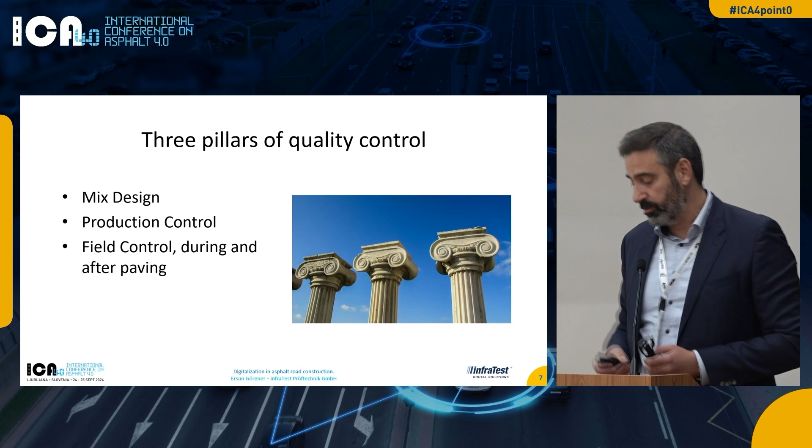My personal definition is digitalization has to make our life easier. This is, for me, what it has to be, not more, not less. So, starting with these words, I would like to come to our field of work, quality control. As I always say, we have three pillars of quality control: the mix design, the production control, and the field control during and after paving. I have only 10 minutes, so I've picked a few topics and will give you a small overview. Later you can ask questions, and during lunchtime we are at our booth where you can ask questions and see what I will show you now directly live.

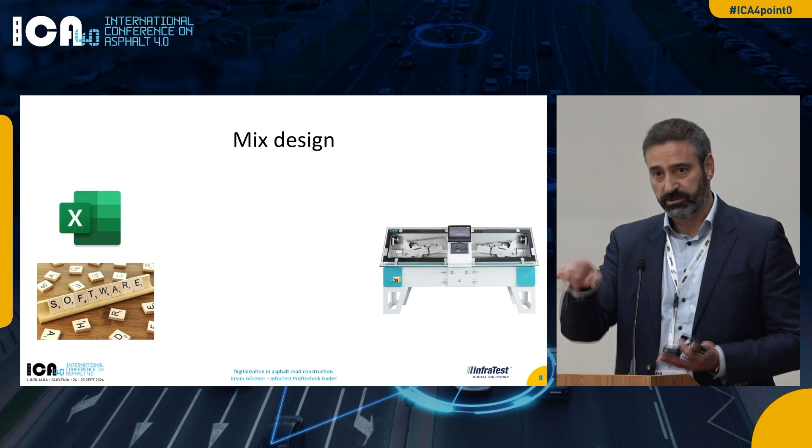When it comes to mix design, it's easy. We make a lot of tests in the laboratory and take the results. And nowadays, more or less, we still use ordinary notepads, or an Excel sheet or software, but somebody has to put it in there, written or using a keyboard. But the next stage has to be, will be, and has started: the machines and software have to communicate. It's not a question of if, it's a question of when.

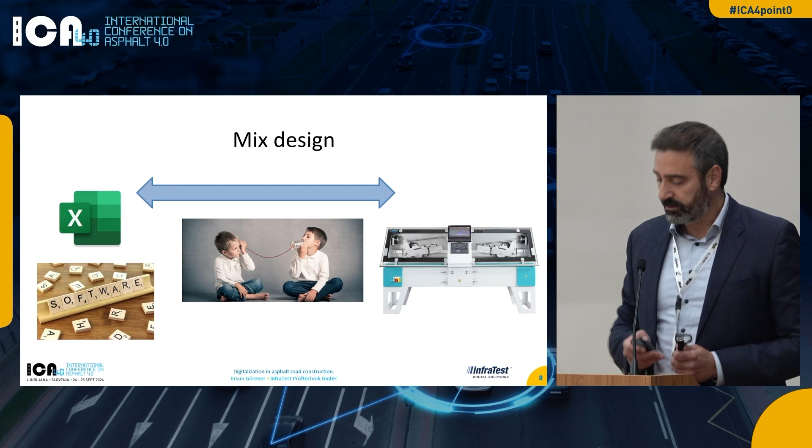And this started and will be one of the next projects and topics for quality control engineers in the laboratories. Also using the clouds, getting all data and combining this data in one cloud system and taking it out wherever you are, and not having to be somewhere to check it out.

So now we come to field control. This is the part where I want to talk more about it, because I think this is what makes all these things, as Ralph said today, sexy. So we have to be more sexy than until now. When it comes to field control, this is for me one of the best.

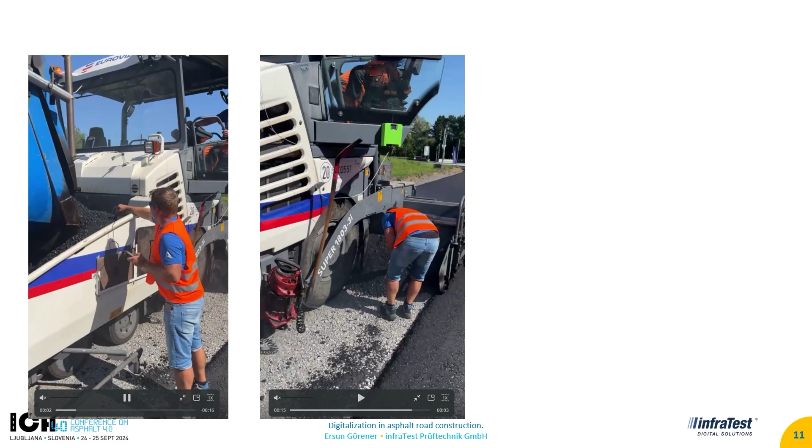This is in Germany, because of the regulations, what we have to do. We talked about this also last year in Madrid. We have to take the temperature of each truck during the dump of the asphalt into the finisher. It is mandatory. You have to do this. And actually, at this moment, this is done by people. They are going there with a temperature probe and checking it and taking a note.

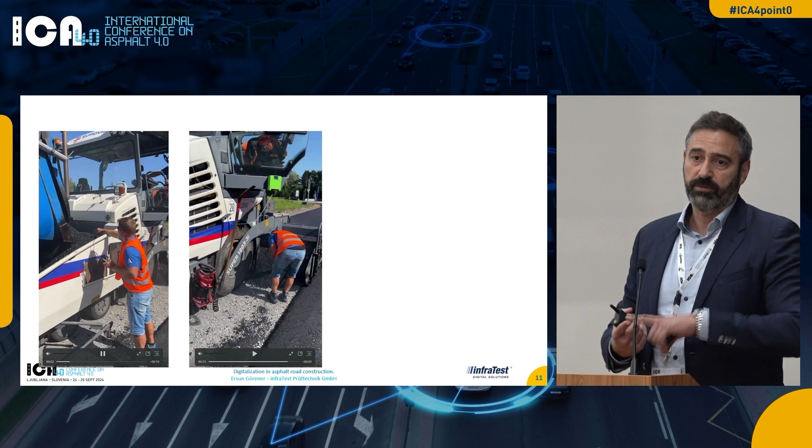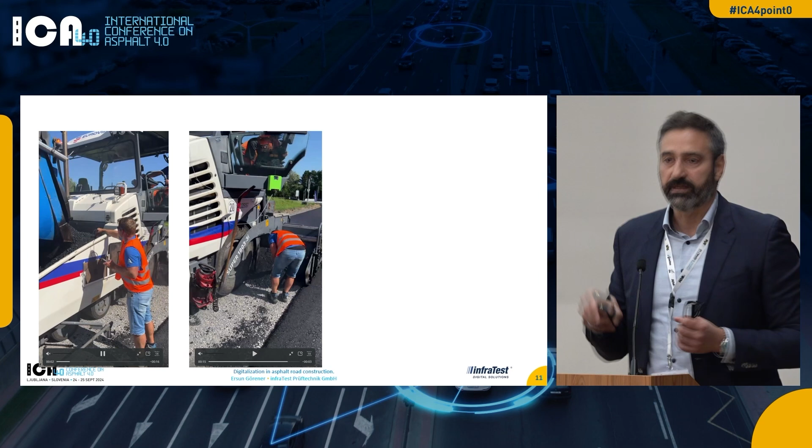So you can do this, yes, but on the other side, we are talking about work safety, workers' safety. We are talking about digitalization. We have 2024. It doesn't fit, and it is really dangerous. Imagine if you work with two finishers at the same time, and somebody is running around there, and the people who are running the finishers are in stress. They don't want somebody who comes there and measures, etc. It doesn't work. It shouldn't be.

So what can be done? You can really use very, very easy methods, but they have to work, of course. Easy methods to check it. You can use, as it is shown here, special sensors, infrared sensors, which detect the whole time the temperature of the dumped asphalt. And we use, for example, special ultrasonic sensors, which detect that a truck is coming, so to know, okay, it is for this truck, and the next value is for the next truck.

And then you can get the report and send it directly to the authority, and it's done. It is safe, it is fast, and at the end it saves you money, because people nowadays are expensive and because they are not there. Good people are not there.

And perhaps one point back, why is this also very important? We will hear this today. For example, my colleague from Germany, Stefan Haneschweger, will talk about the topic of warm mix asphalt. In Germany, it's not only a wish, it is now there, it will come, starting with 2025. We have to produce warm mix asphalt, and at the end of the day, somebody has to check if the asphalt which is produced is really warm mix. The authority wants to see that it is warm mix when it is delivered.

The people who have the job to pave have to know, do we get the right warm mix from the asphalt plant, etc. So you have to implement these types of technologies to be on the safe side for all of us.

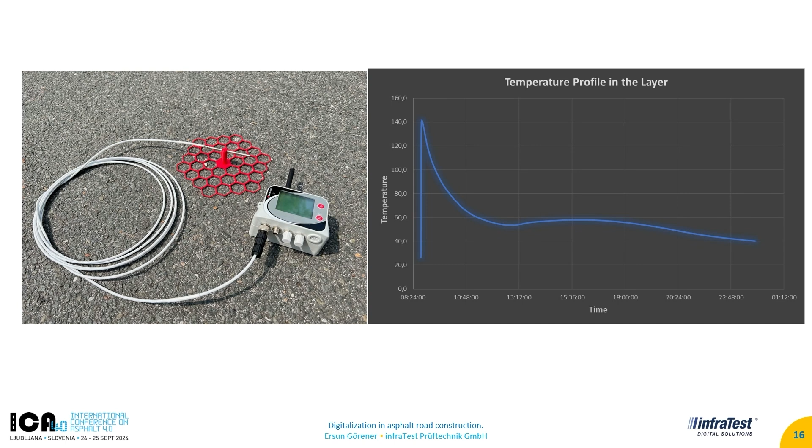And this is important to know at this moment because things are changing. People working outside are used to knowing how the hot mix asphalt and its temperature react when it comes at 170, 180 degrees. They know it. Also the people who are driving the compactors. But this will change because the temperature should not be 170, 180 anymore.

It will be something between 120 and 140, I don't know, something like this. And then you will not have so much time to compact your asphalt and your hot mix. So it's mandatory to know what is happening, what is the cooling phase, the cooling time of your hot mix asphalt, and know it and monitor it.

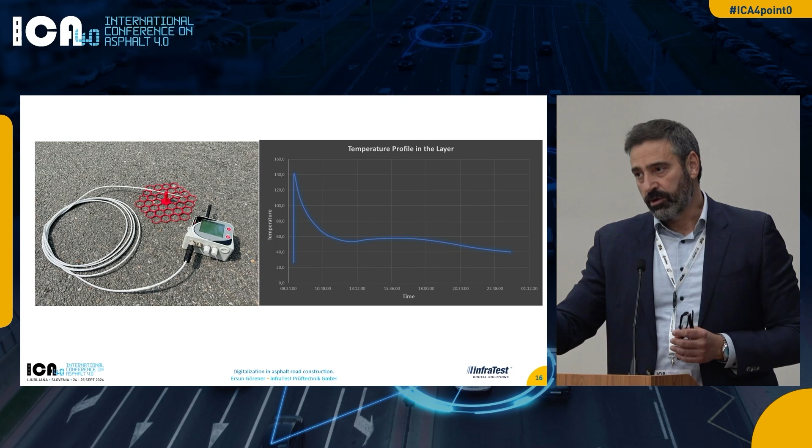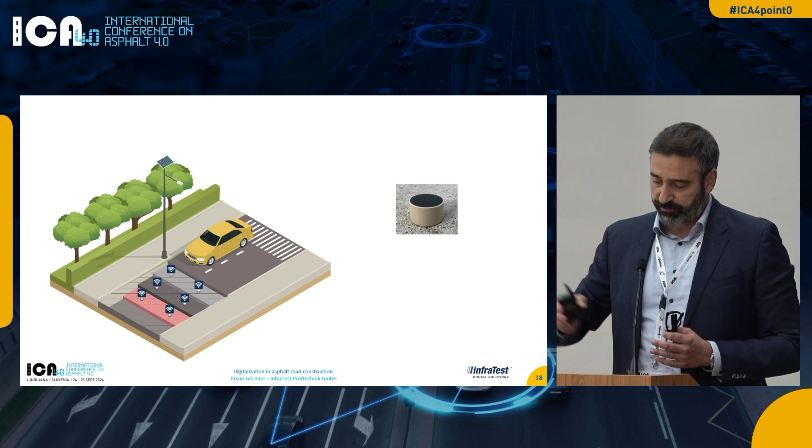And that's the problem. These are, for example, limitations when it comes to sensor technology used in hot mix asphalt while the asphalt is delivered hot. As I said, in this type of sensor you have a temperature measuring system. For this unit, it's not a problem. It can measure up to 260, 300 degrees. But there is also a battery in it. And battery and temperature, these are two things that don't like each other. So to save the system's life, the system shuts down once it gets an extremely high temperature impact. The system shuts down and waits until it's cool enough and then starts again.

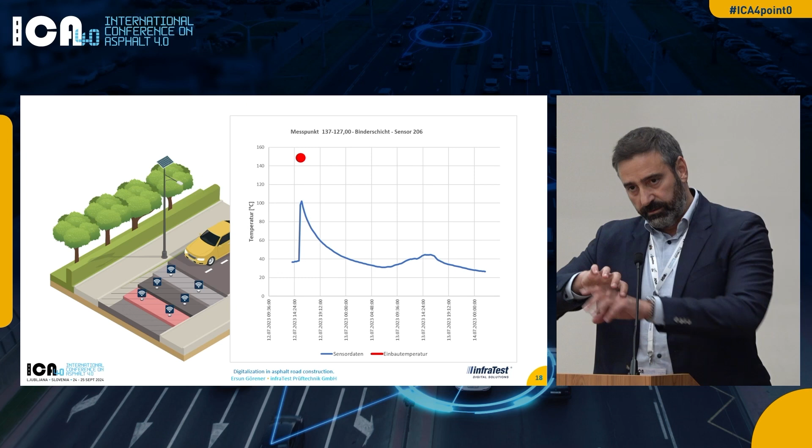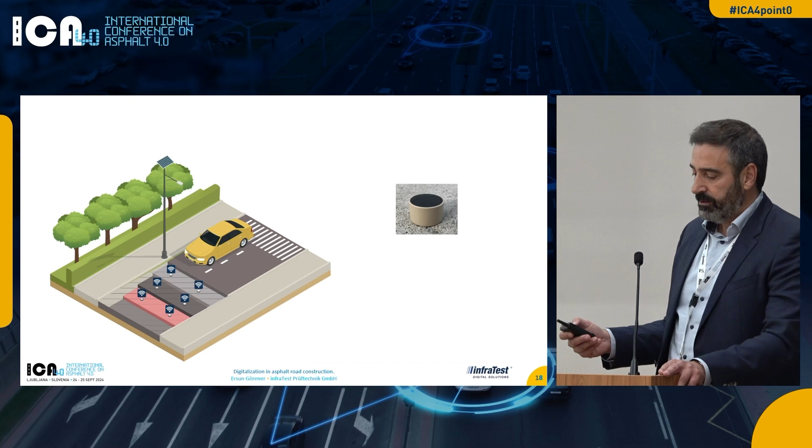And this restart is by chance. So when it shuts down at 125 degrees, for example, then it waits until it has a safe ambience, and then it starts. And this can be, by chance, 110, 105, or 80. That means, different than here with the ordinary, let's call it old method, where you can measure the complete temperature range, here you cannot do this, because especially at the beginning the cool down rate of the hot mix asphalt is very fast, and you miss the most important first degrees.

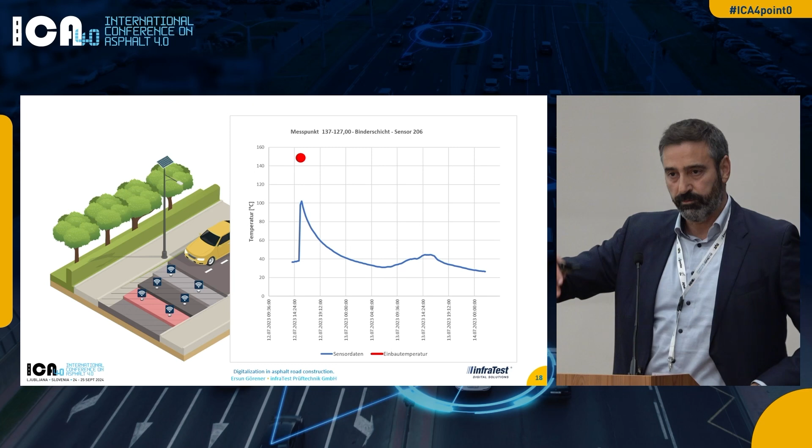So these types of sensors are very interesting and very good for long-term monitoring, where you put them into the asphalt and say, okay, I want to know the temperature profile within the next 1 or 2 years, and then get the data back.

But of course, we want to know more. We all read newspapers, or meanwhile we don't read newspapers, we look at our mobiles and iPads, etc. And what we see is we have a problem. We have climate change, and things are changing. The reason can be X, Y, Z. It's not our topic, but there is one fact: something is changing. And we have to know what the effect of this climatic change is on our road network. I'm sure there is an effect, but we don't know it at this moment.

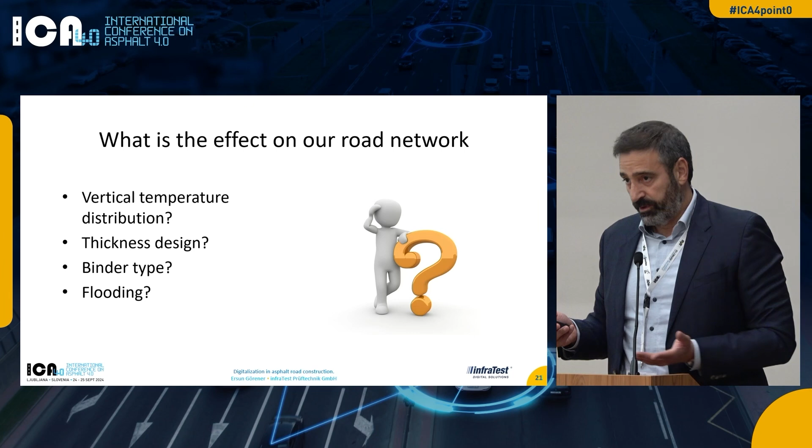What is the effect on the vertical temperature distribution? What is the effect on the thickness design? Because when there is an effect on the vertical temperature distribution, then we have to think: for our thickness design, based on data we got, depending on the country, 50 or 40 years back, do we still use the right data? Or the binder types which we use, etc. Topics like rutting and so on. We don't know what is happening.

So for this, because we are here now in Slovenia, I checked what the climatic zones in Slovenia are. And even though it is a country with 20,000, 21,000 square kilometers, we have 3 climatic zones here in Slovenia. I think it is very interesting to know the climatic change and its effect on these different climatic zones. Or perhaps, regarding asphalt and pavement, do we have different climatic zones meanwhile or in the next years?

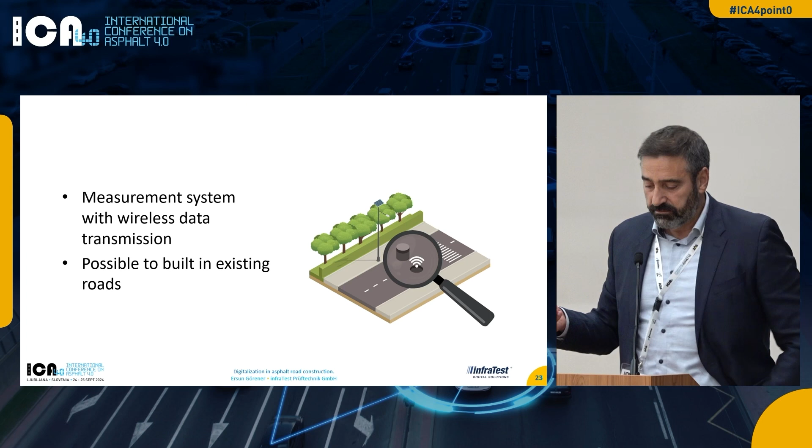So what can we do here? This is the idea: to have measuring systems which collect the data and send it wirelessly, so you can directly monitor it. And this is, for example, this type of artificial core which you can use. They measure the temperature constantly, transfer the data wirelessly, and have a really easy installation into existing roads.

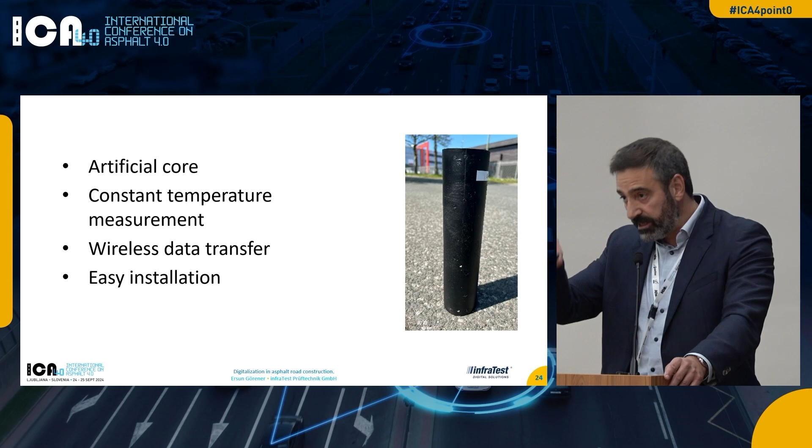It's, as shown here, very easy to take it. You take a drill core out of the existing roads, you put the artificial core into the existing roads, you backfill it with the resin, and that's it. There's nothing else to do.

Then you connect the artificial core with a gateway, and the gateway sends all the data directly into the cloud, and from there you can get it into your existing system. And interesting here is, here you can use, for example, the so-called LoRaWAN technology. The maximum distance between the core and the gateway, outside regions, motorways, etc., can be up to 15 kilometers in open area and 2 kilometers in cities.

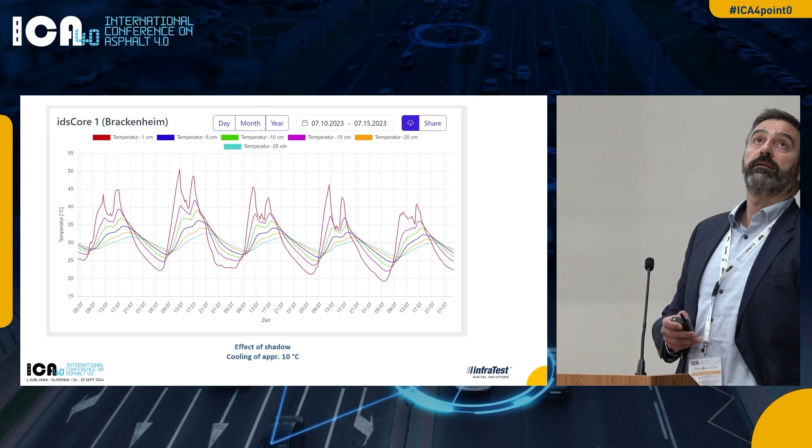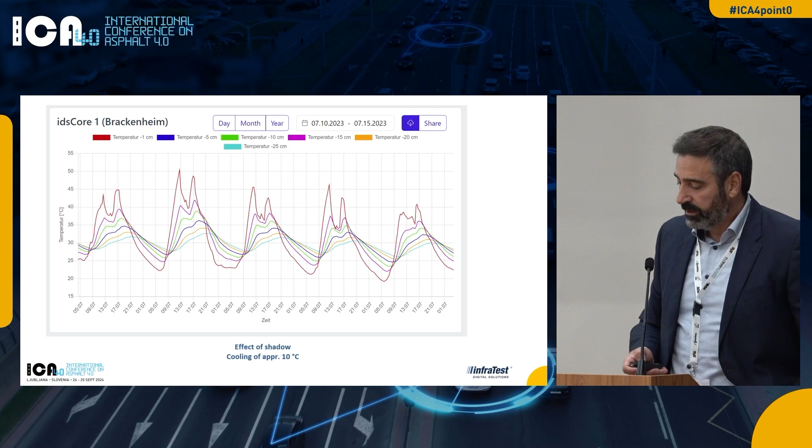Just to show how things like this look, it's one of my last slides. This is a temperature profile which we measured in Brackenheim in front of our factory. And what you can see is that during noontime, the shadow of the tree, what you can see there, is directly on the sensor. And there you can see the peak, which goes down approximately by 10 Kelvin. And this is only the effect of one tree.

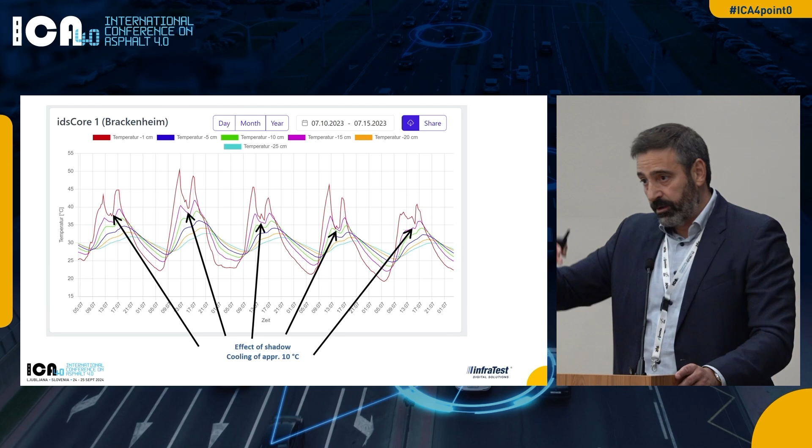So we don't know how the effect is in cities, for example, where you have shadow systems because of buildings. Perhaps we are over-designed or not thick enough, because we have special areas where you have only pure sunshine without any shadows, etc. So conclusion, it's my last three words.

I think, and we will see it the next days and today, we have digital technologies which enable us to understand asphalt better than ever. Because until now, sometimes you make everything right. Design is right, paving is right, production is right, but it doesn't work. And you don't know why. But now we have possibilities to understand why.

We have to be open for this. This is a topic which we had also today in the morning. We have to be open to try new technologies, because if we don't try new technologies, if we don't act now, we react tomorrow. Thank you very much.

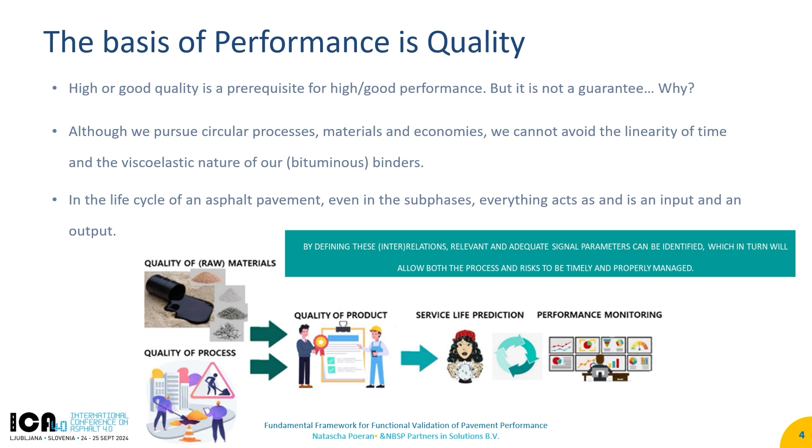And then the other interesting thing about our pavement life cycle that also hampers us to really be fully in control of this pavement performance is the fact that we try to reach for circular processes, but within our pavement process, we cannot deny the linearity and, for example, the viscoelastic nature of our asphalt mix in the basis. It means that everything in this pavement life cycle, every time you perform an activity to go from one stage to the next stage, you provide an input for the next stage, and in the next stage, you will always provide an output that will be another input for the stage again. So it's a continuous cycle.

And it means that if in the beginning you have some measuring fault or some measurement mistake, the only thing that will happen is your mistake will grow and grow and grow, till at the end you have your pavement and maybe it fails in 2 days. You will never be able to find out why. You do the same thing 2 weeks later and that pavement will lay there for 20 years. Don't know why.

That's not making my life easier. So, I think...

The first big step we need to take is to be aware of these relations in the life cycle stages. We need to make them explicit, because this will allow us to define, for every phase in our life cycle and for every relevant activity that we perform in our pavement process, what are the relevant parameters to measure.

For example, the temperature in the layer is very relevant if you are processing the material. So if you have the bulk matter on the site and you want to make it into a preformed layer, it's very important to measure the temperature. But is it also very important to measure that temperature in the use phase? We don't know, right? But by making these functional interrelations explicit, we at least, if we apply new techniques and new methodologies, have made a place for that data and those results to be relevant, to be used and analyzed.

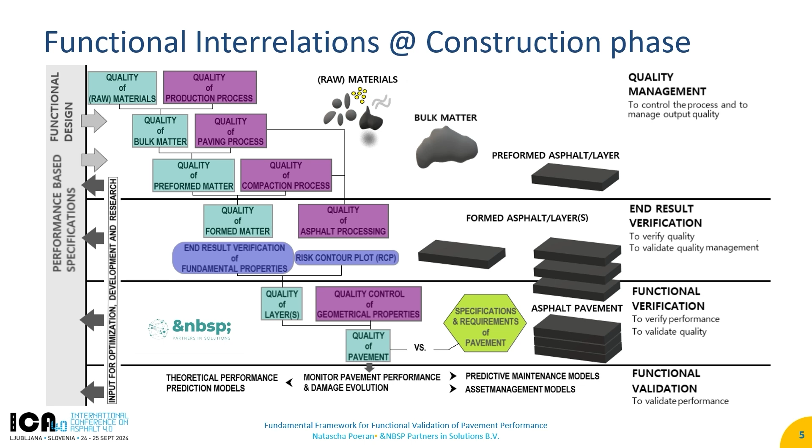Everything I just saw this morning, for example, shows we are really innovative together. There are a lot of new techniques and new measuring systems coming up every day. But what we fail to do together is make sure that all the knowledge we gather in all the countries can be analyzed and evaluated in one and the same uniform way. If we manage to do that as pavement people, then I think that would be a big win.

And I think, that's what I forgot, if we can make these relations explicit for every phase of the life cycle, we also need to understand each other. And this is what I mean with semantic interoperability.

We can talk about asphalt, we can talk about bitumen, but if I'm in America and I talk about asphalt, I'm not really sure if I'm talking about a binder or a mix. There's a lot of difference also in our definitions.

So here, for example, I say we need to make, let's say, our pavement lexicon. And the only way to do that is to really define what we actually want to measure.

Because we know we are working on a pavement. We know we want to be in control of pavement performance. But what does that mean? What's the function of the object? What's the function of the pavement? And which properties, for that specific pavement in that specific situation, are relevant?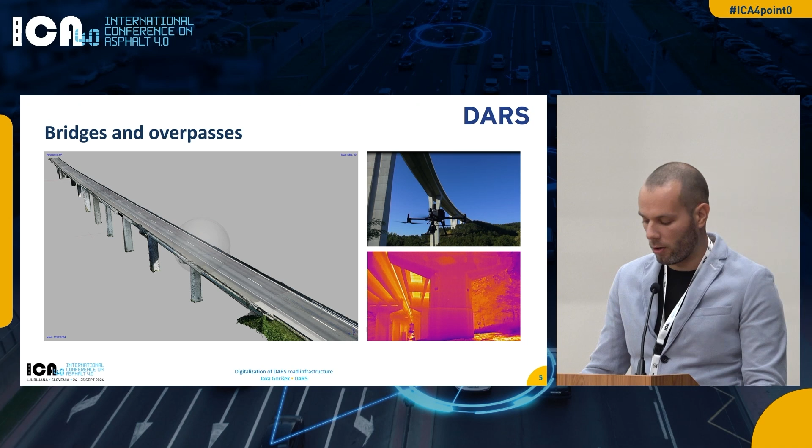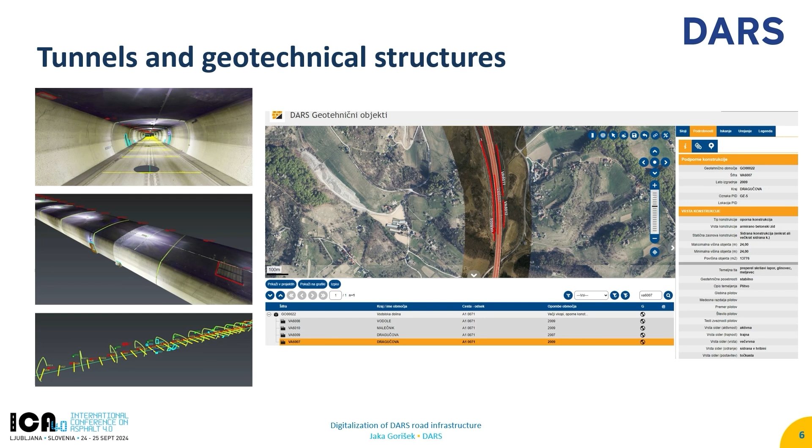Similarly for tunnels and geotechnical structures, another very important infrastructure element that we have. Here we are also using many digital technologies to help with the inspection process. We have fully digitized interiors of our tunnels with laser scanning or LiDAR technology. And in geotechnical structures, we have many IoT sensors installed so we can have live data about the behavior, to see how certain structures are doing or behaving at different points in time.

Then we have road markings and traffic signs. This is, of course, a very, very important part of the road infrastructure from the everyday users' point of view.

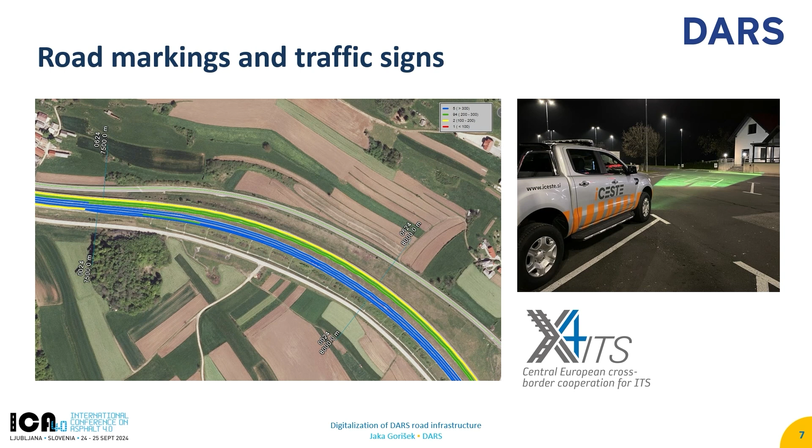We all drive on highways almost every day, and it's really important to have well visible road markings and traffic signs, not just for regular drivers, but also for advanced driver assistance systems, because they take into account road markings to help navigate the car. Here we are using mobile mapping technology to measure reflectivity of road markings and traffic signs, so we can keep them in good condition and well reflected in tough conditions at night or in fog, so drivers can more safely use our highways.

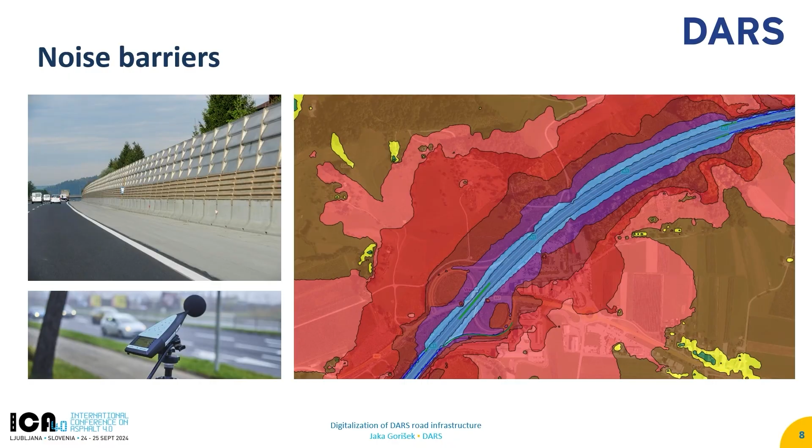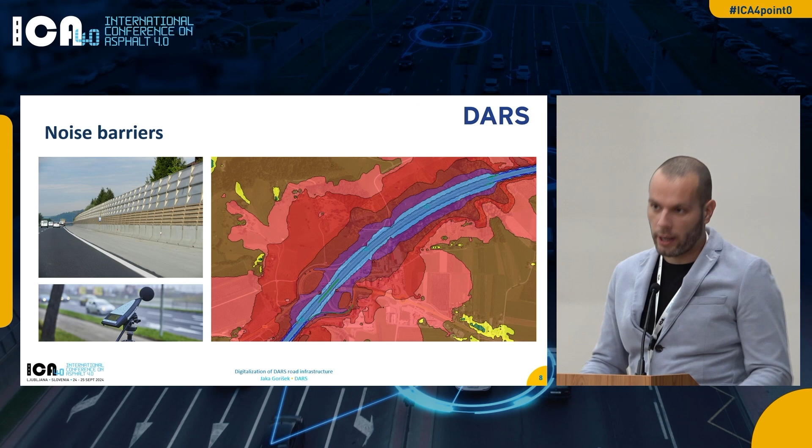One of the other things we are interested in is noise levels or noise pollution from the highway. This is especially important in highly populated areas with high density of population. We have lots of noise barriers already installed, and we do periodical monitoring measurements of noise levels. Then we can create visualizations that show us where we may need to improve or add more noise barriers, or make them taller.

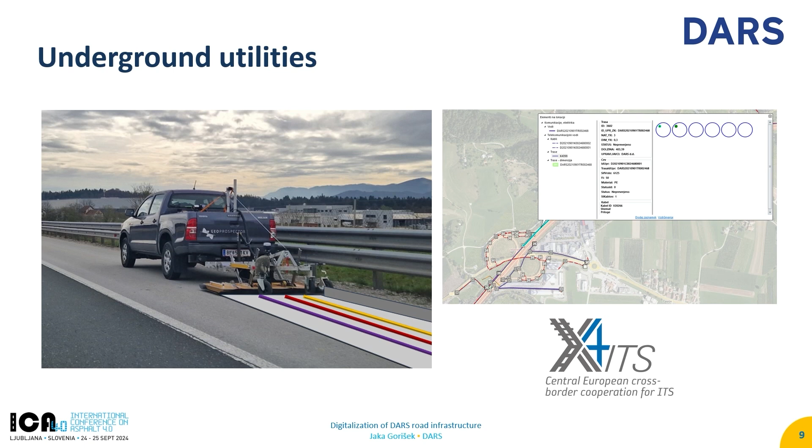We are also engaged in a very interesting project about digitalization of underground utilities, which are part of our road network because they provide power and telecommunication to all the traffic systems along our highway. Here we use ground-penetrating radar technology to increase the positional accuracy of our existing database, and with that we hope to minimize damages that come from excavations or roadworks when we wouldn't have data of such high quality.

There are also other interesting digitalization techniques that are not so specific to individual infrastructure elements, but more focused on the highway as a corridor as a whole. One of those is mobile mapping or mobile laser scanning. Here we generate two outputs: the first is panoramic images, like Google Street View type images of our highway system, and the second is a LiDAR point cloud. This is a very high definition, high resolution point cloud that can be used for different plans, analysis, and simulations, and it allows our employees to make 3D measurements of everything around our road network.

One of the last cases is also the use of aerial vehicles for creating high-resolution digital orthophotography maps, or base maps. This is a very high-definition layer that we use in GIS systems and others. It provides great accuracy, and combined with other data types, it generates really helpful visuals for the whole process of managing the motorways.

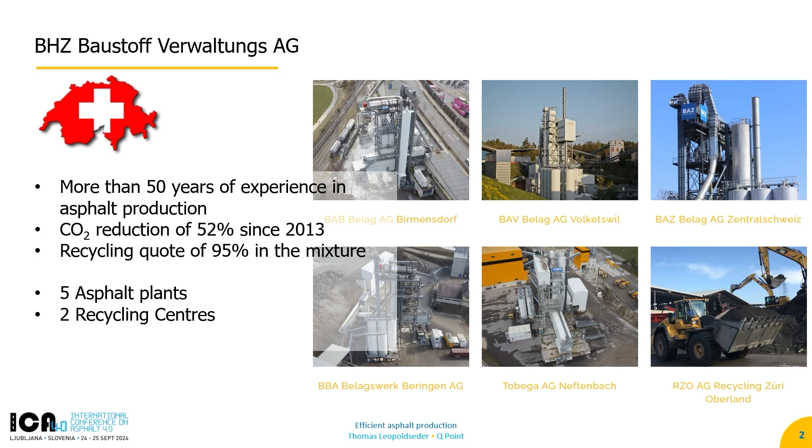So a very good example if they are able to digitize their processes and which benefits they are getting from that technology. If you look on the homepage of that company, you see a statement which you see at many other companies. Innovation is a topic, innovation is something we are doing, but the question is, are they really doing that? If you look closer on their website, you see directly on their homepage that they have a link to an app. This app is the communication and the link to their clients.

So you can download this app, and then the digital communication between the construction companies and the asphalt plant is automatically initiated. So a very simple approach for the asphalt plant to integrate their clients into a digital workflow free of charge, without cost. Just a very small preparation behind the scenes, but it takes only some hours that the clients are online, a very short training or an online training to see how this app is working, and then they can start ordering and managing their processes in a digital way together with this asphalt plant.

So how does this work? In this app you can create your asphalt project, you enter your basic data, and this data is shared to all people who are joining that workflow. It's not stored on the app. It's saved in the cloud, and so everybody who is connected can get access to that data. In the second step, they are creating their orders, and these orders are automatically transferred, when the time is coming to pave this road, to the asphalt plant.

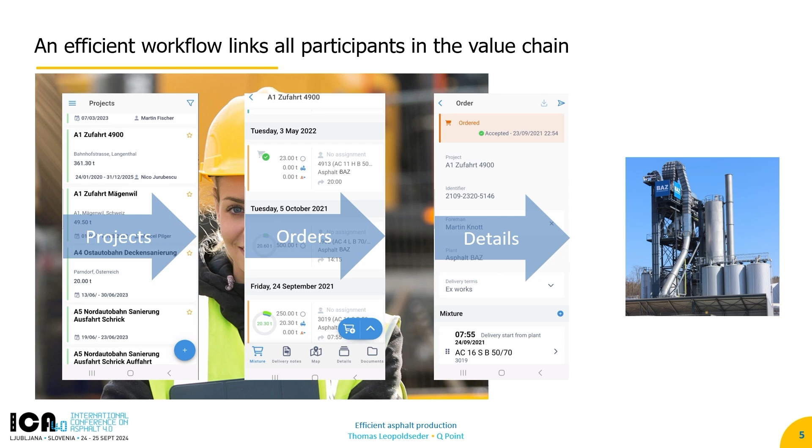There are some details about the quantities, delivery dates, everything you need to produce in the correct way, but also everything the construction companies need to pave in a correct way. And these things are working together. So this information will be passed then to one of these 5 asphalt plants. And here in the asphalt plant, it's very quiet. Nobody is phoning, nobody is reading emails or WhatsApp. They are reading the digital orders in their system.

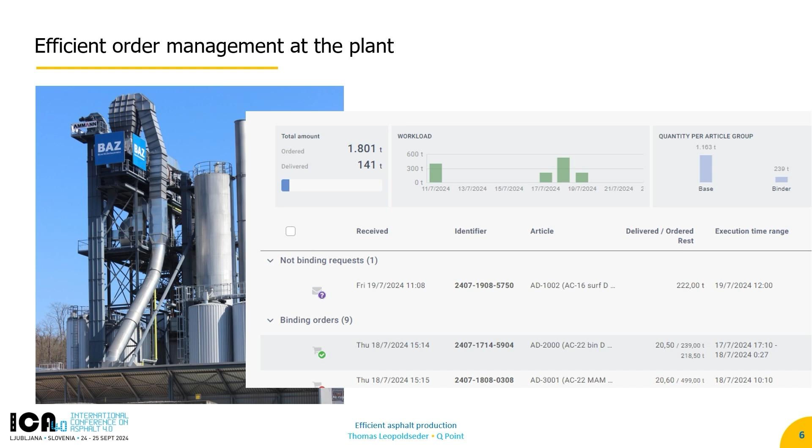And so they get a lot of information about these orders. They get the information about the current utilization of the plant to see if they can produce it. They can communicate with the construction company in a digital way, not using a phone. They just write a message in the system, and then the construction company sees if this production is available, if this is possible, if there are some changes. Everything is traceable and in a digital way.

The advantage for the group is that they have a forecast about their production quantities, because they were able to convince the clients not to enter only the demand for the next day or the day after. They plan in advance the next weeks. So they have what we call in our solution non-binding requests. It's just an idea, I want this amount of asphalt in 2 weeks.

But the advantage for the asphalt plant is that they can see what they have to produce in the next weeks. They can plan their raw material, they can plan also their production and all these other things. So we have the short-term planning, the middle-term planning, and the long-term planning based on this digital data.

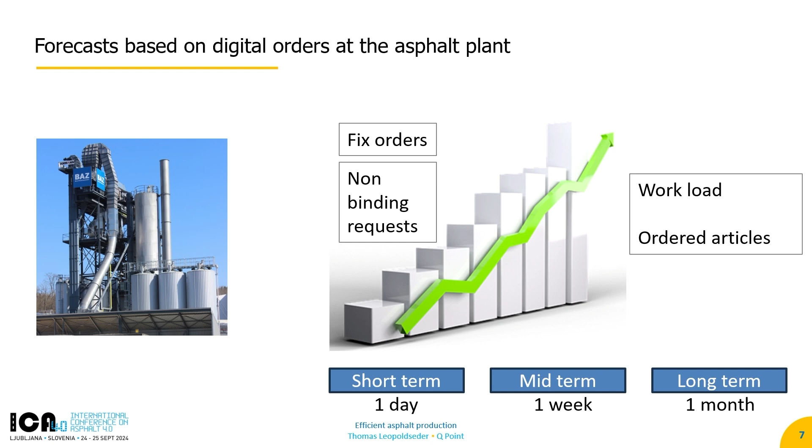A very important thing is then, after the production, to analyze the data, what has really happened during the production. So what we are doing is we are linking the control system and the production systems together in one database, and visualize then in dashboards, for example, the energy consumption of the production. And you can compare it then in this group to find out where the production is more efficient and where not.

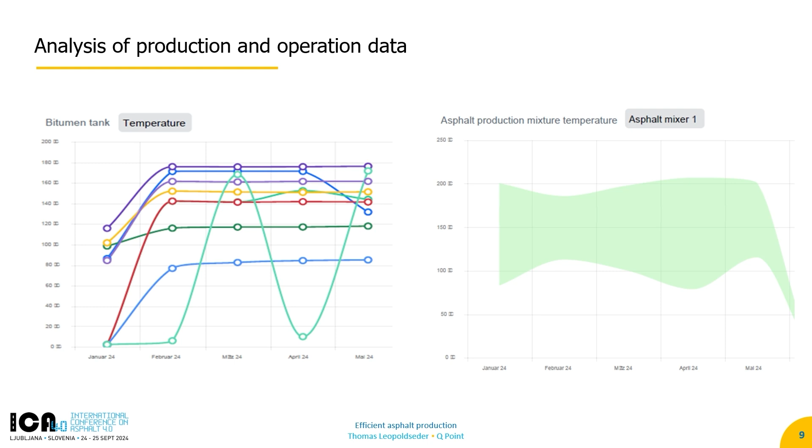Or we export this data to external applications, so you build your own reports and statistics, also a very important point. You see here some examples analyzing the temperature during the production, analyzing some other figures during the production to see if the production is running well or not so good.

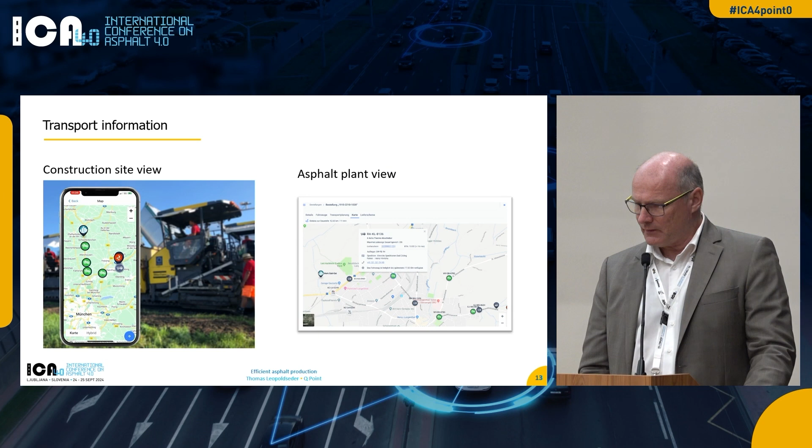So a very important point is the transport. So we are tracking also the transport, or the company is tracking the transport. So you see on the map when the trucks are coming to the construction site, and for the plant, it's very important when the trucks are coming back to the plant, because then they can prepare the next production lot, and so there is no space between the loading procedures.

Yeah, what is the summary? It's a very good example that digitalization is really working in practice. It's not a theoretical thing. You can use it. And it brings a lot of benefits to this group by integrating all the customers. And in fact, they are getting more than 90% of their orders in a digital way. Nobody is calling them. They're just getting everything in this digital way. And so they can manage their plants in a very efficient way, and they can use this data to optimize their plants.

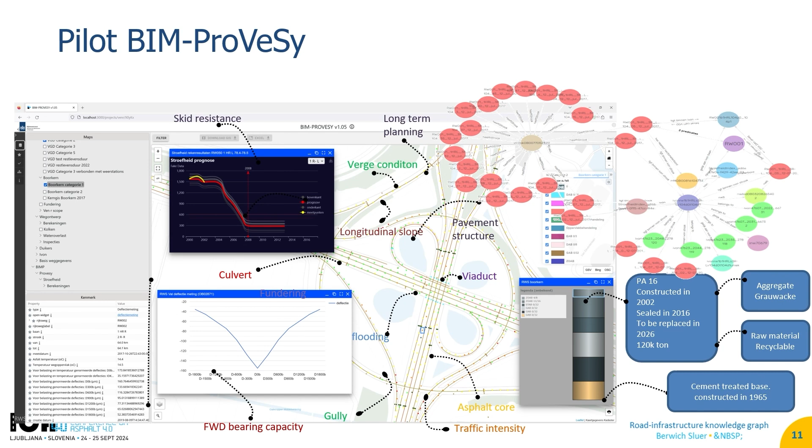So some recommendations. If you are involved in this work, and you are in fact starting to be, if we talk about Europe, use the European standard 17632, semantic modeling and linking, as the foundational ontology for the development of ontologies. Why? Because then it's rather simple to link your ontology to the ontology of another organization, or the ontology of another country, and so on, because they are based on the same foundation.

Then, since big data is also all about reuse of data, try to find existing ontologies and try to use those existing ontologies, because then you don't have to think completely from scratch about the relationships within a certain domain. So try to reuse and make use of already existing ontologies.

And of course, now we are here within this community, related to the community of EAPA. It's recommended to set up an international platform as an open space to publish and manage ontologies, so it makes it easier to reuse the ontologies. And a knowledge graph for the road industry. So this is my last sheet. Thank you.